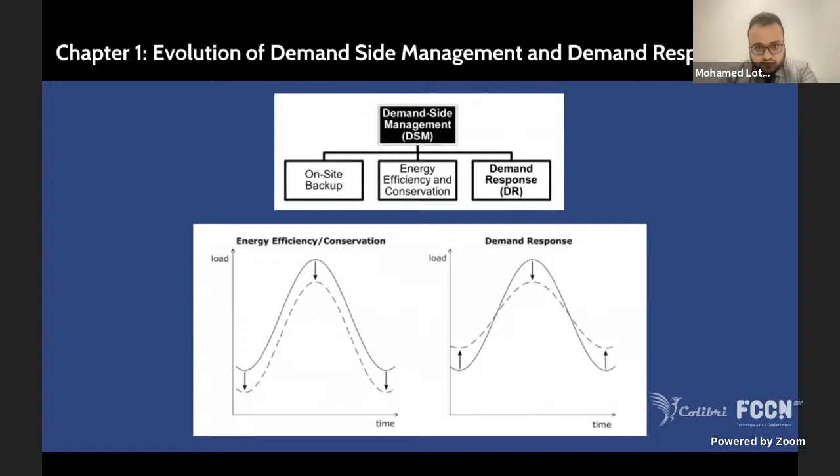Chapter 1 starts by identifying what demand-side management is, what are the different strategies involved in demand-side management, and then we go to the origins of this transition, going all the way back to the 1970s, where 3 different events, the economic viability of small generation units, the beginning of the awareness on environmental change, and the beginning of concerns on security of supply have emerged. And as such, a major shift in the electricity sector happened through liberalization and the beginning of incorporation of renewable energy sources. And this was the time when the demand side started being considered as active participants.

The pioneers of this change were the US, the United Kingdom, and the European Union, the 3 main zones that led this change. And I begin by gathering and compiling the full list of legislation for each of the 3 regions that led to this change, starting from liberalization all the way to modern demand response strategies for the United States, for the United Kingdom, and the European Union. Afterwards, by compiling all this information, I managed to draw a roadmap, 5 stages of developing full demand response programs in smart grids.

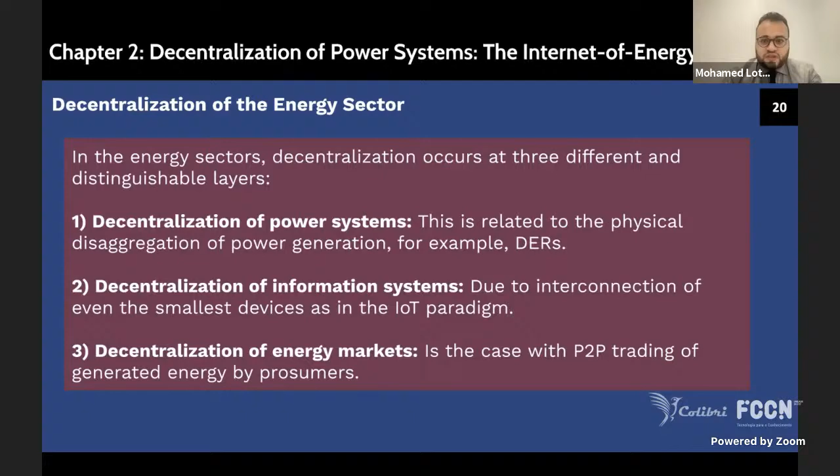More information about this chapter can be found in two papers, one book chapter that was published, an Elsevier book chapter, and another one found in the IEEE Smart Grid newsletter article that were both published as a result of this chapter. And so the introduction is done.

I move on to the main core of the thesis, which is the development of the new models. And part two discusses the transition to cloud-based operation of smart grids. Chapter 3 discusses the current state of smart cities and how we can coordinate contemporary energy management systems to come up with synergistic benefits from this coordination. And then chapters 4 and 5 take this a whole other step further and try to completely dismantle and completely decentralize the way power grids are managed.

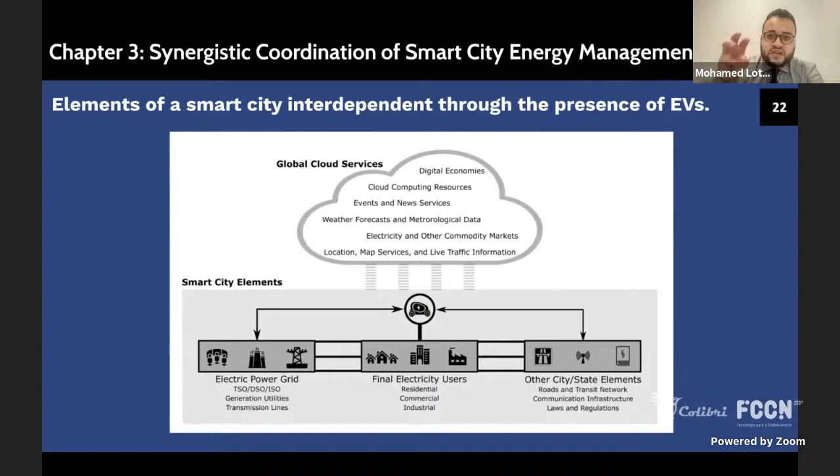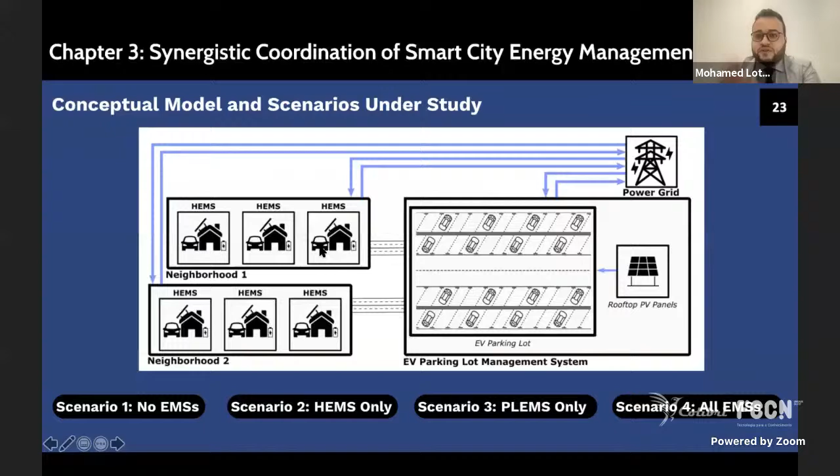In chapter 3, I start by listing the elements of what a smart city is in the current context and how electric vehicles can be seen as the main connector between these different elements. And we develop a conceptual model for this by considering two neighborhoods with home energy management systems and the faculty parking lot, actually modeled as FEUP, in fact, with its own energy management system. Both are linked to a power grid, and the electric vehicles provide the link between these different energy management systems.

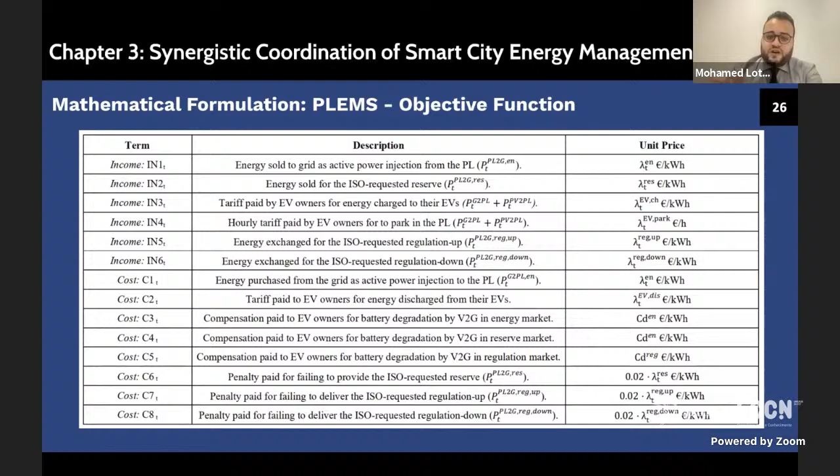We develop a mixed integer linear programming model for the parking lot energy management systems, and the constraints are shown here. I put all the equations here, and we can go back to them in discussion, not to waste too much time. This is the objective function. So the parking lot energy management system focuses on maximizing the profit, by increasing the incomes, by selling electricity, whether to the grid or to the EV owners, and minimizing its cost of purchasing electricity.

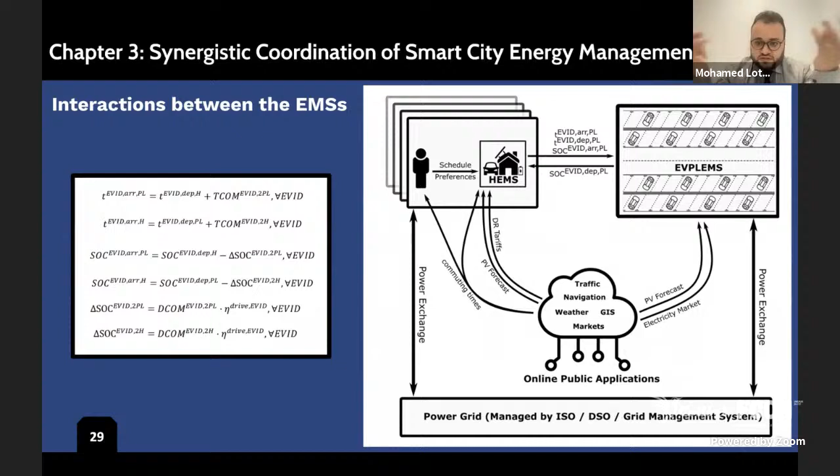On the other hand, we have the home energy management system. These are the constraints, and the objective function, of course, is to minimize the electricity bill for the owners. The energy management systems communicate by sharing the expected arrival and departure times. This is how electric vehicles provide this link in a smart city concept.

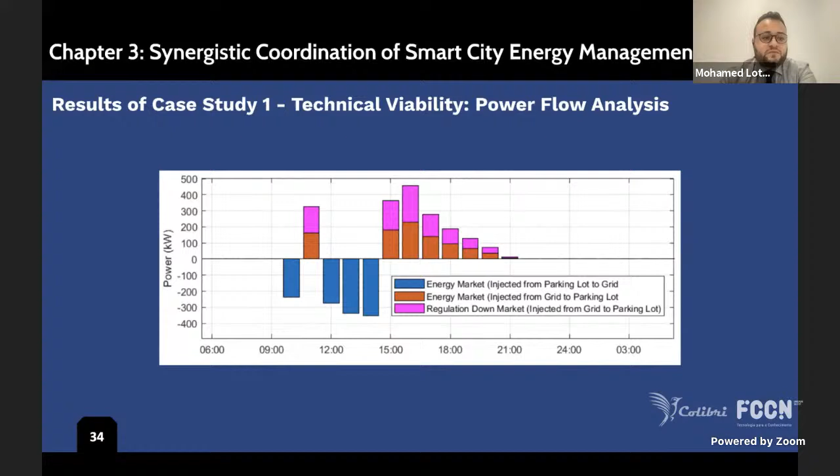And by simulating this grid, we get the active power exchange for different scenarios with and without the coordination for the smart neighborhoods, for the parking lot energy management system. And we also analyze the energy losses in the grid, the power losses, the power supplied by the grid, and also the voltage profiles. The results of the first case study show that by applying the coordination, we get benefits in terms of minimized energy losses and also less energy supplied by the grid.

This work is published in an IEEE conference paper and also accepted with minor changes in Applied Energy, full case study. And this revision was resubmitted. Now I move on to chapters 4 and 5, where instead of looking at contemporary models, we try to come up with completely new ways.

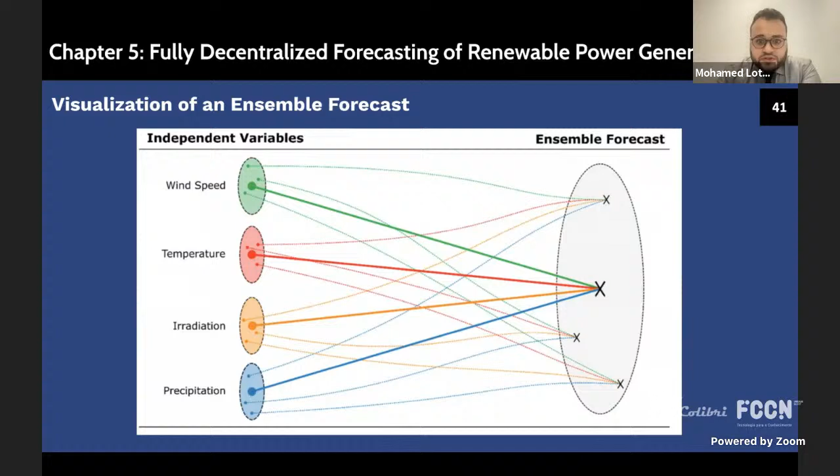Chapter 5 for forecasting and chapter 6 for power flow management. In chapter 5, a new probabilistic method is proposed to forecast renewable power generation. It is based on kernel density estimation and only relies on local and publicly available historical data. The main premise is, from a historical data set, we find the most similar cases using kernel density estimation, and from there we conduct an ensemble prediction to predict the new value.

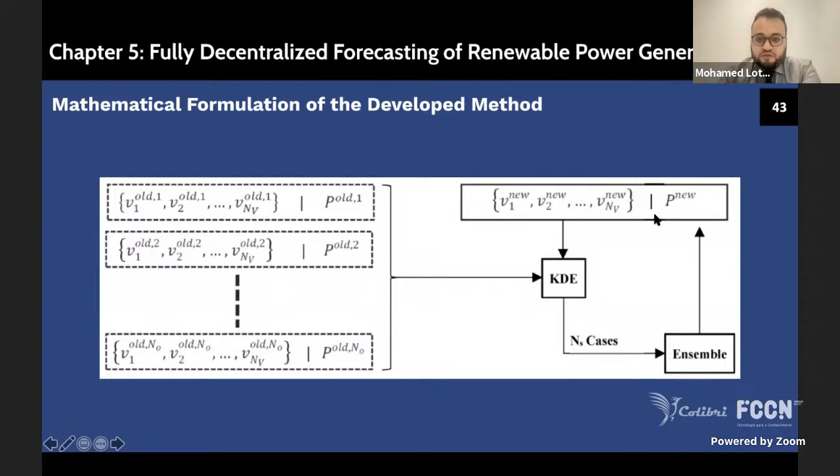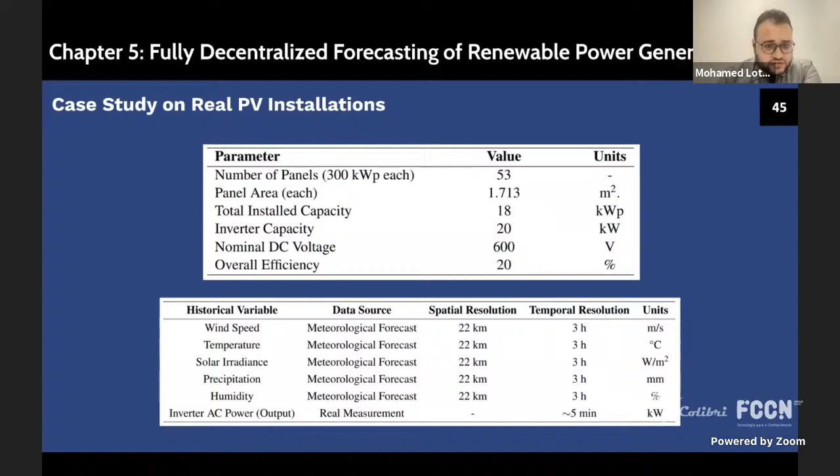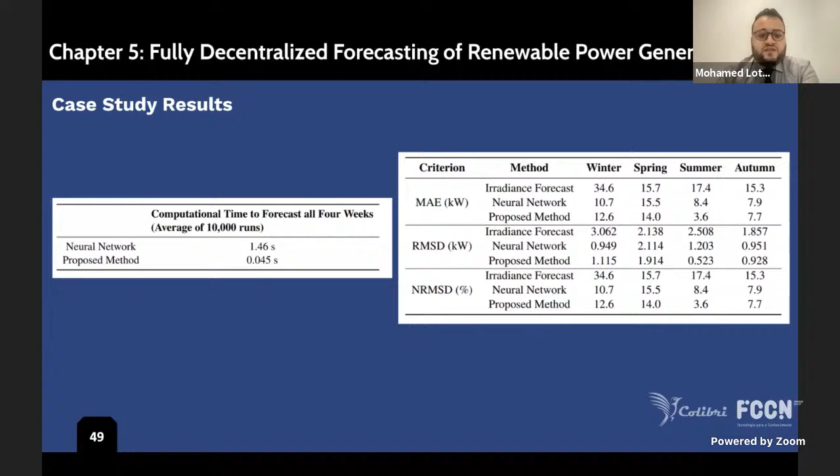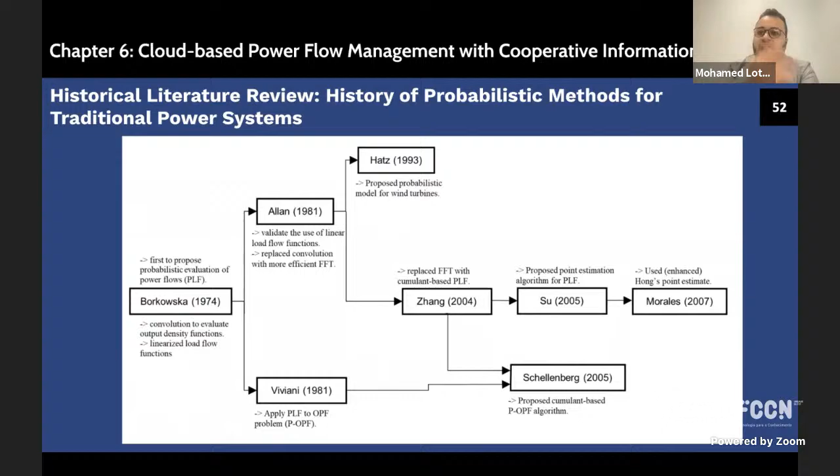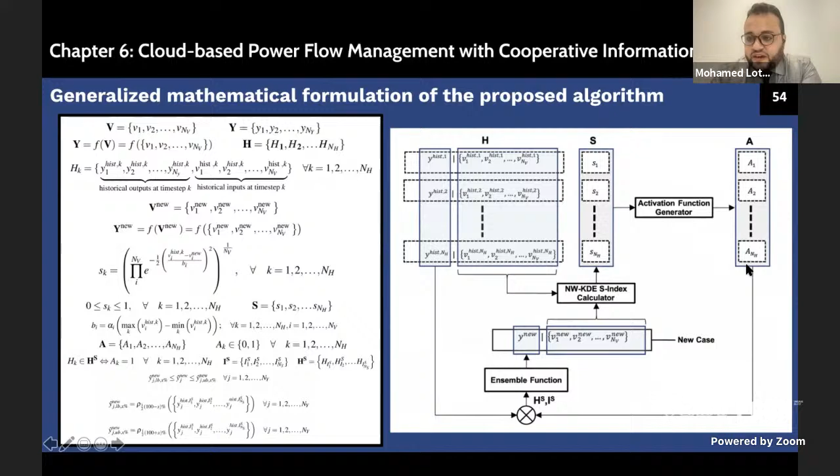And we use this method to expand it to a machine learning method in chapter 6 for power flow management in smart grids of the future, for the decentralized smart grids. We start by checking the history of how probabilistic methods evolved into machine learning methods. We categorize the difference between probabilistic and deterministic methods based on this review. And then the new formulation is presented. This is very similar to the previous case, except here the activation functions for the most similar cases are saved in an activation vector, and this will become very important in the next 2 slides.

This is the transition that we propose from centralized operation to decentralized operation. The historical log of the optimal control actions are passed on to local agents for each zone, and each agent only has access to information in their local zone. And based on that, they use the employed method to predict the optimal control actions in operation and operation planning. The activation vector can be used to have a cooperative information exchange platform between the agents to improve their control actions without sharing the raw data. And this is actually a major contribution of this work, and we investigated it by simulating a case study.

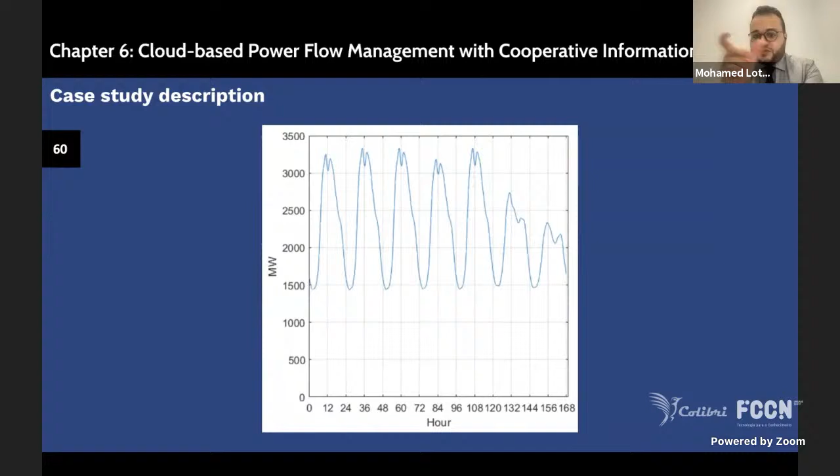We have here a 24 bus test system. We divided it according to the conceptual model proposed. We used 1 year of high resolution, so 15 minutes, data from ERSE profiles, from the Portuguese transmission system, typical load profiles. And each agent, as we said, only has access to the historical optimal control action, historical optimal generation, historical load values only within its zone, the hour and day, so only has access to local and public information. We test this by trying to predict the optimal actions within 1 week, also with a high resolution. And we conduct 3 different studies.

In the first, we check the influence of tuning the parameters, and we can see by doing slight tuning of the parameters, we can obtain an accuracy of less than 0.1% for all the cases, which is highly accurate. Then we conduct a comparative analysis by checking the power of the cooperative information exchange platform. And we can see that even without tuning the parameters and by putting random parameters, simply by exchanging the activation vectors in this cloud-based platform, we can obtain even better results and lower the errors further. So the impact of the cooperative information exchange is actually higher than the impact of the tuning of the parameters.

And finally, to validate it, we compare with the neural network methods, and our proposed method is better. It provides much more accurate results and also higher computational efficiency. This work was published in a conference paper at CPE PowerEng, and also accepted with minor revisions in the International Journal of Electrical Power and Energy Systems. This concludes the second part of the thesis with regards to grid operation.

The third part looks at end users and develops new models for energy management and planning, mainly energy management, to help guide this transition from the point of view of end users, not the grid. Chapter 6 deals with the residential sector, Chapter 7 deals with the transport sector, Chapter 8 deals with the industrial sector. We start with the residential sector.

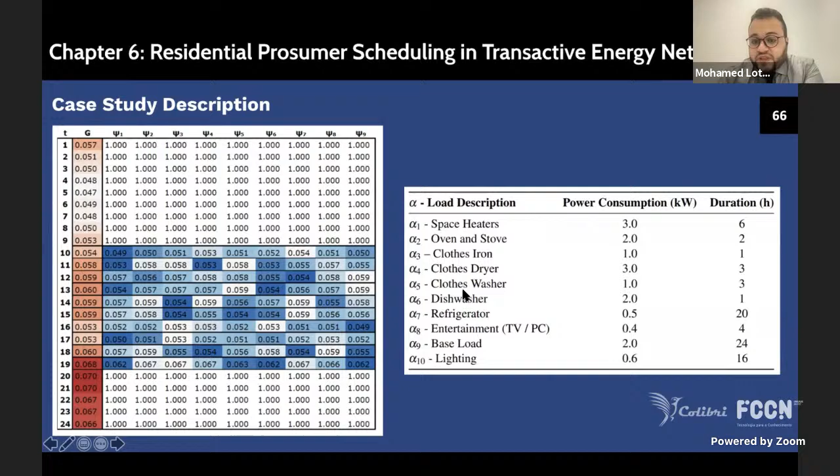Each consumer would have their different loads that they want to schedule. They provide their preferences for the optimal time where they want these loads to operate. And the scheduling tool finds the optimal scheduling of each appliance, which also leverages the energy value for this prosumer.

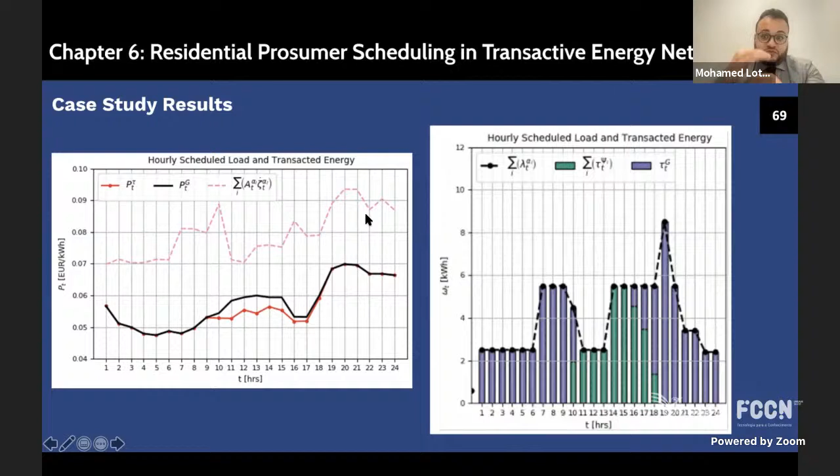We see on the left the schedule, and on the right the scheduled load and the transacted energy, so the choice between buying from the grid or buying from other prosumers. And here the pink line is the energy value, and the objective is to raise it as much as possible. And this work was published in SEST 2019 in this paper for more reference.

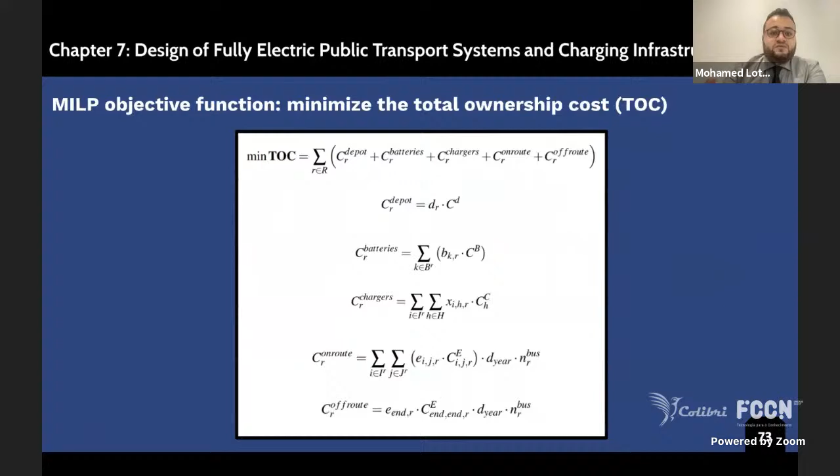Then the next part deals with the transport sector. A generic public transport network is modeled, and all the parameters are included in terms of the charging infrastructure, the batteries on the buses, and the dynamic electricity prices. And the objective is to minimize the total ownership cost of this fully electric transport network. The constraints are related to the infrastructure, the batteries, the energy charge, and energy balance is shown here. And we test it in 3 different ways.

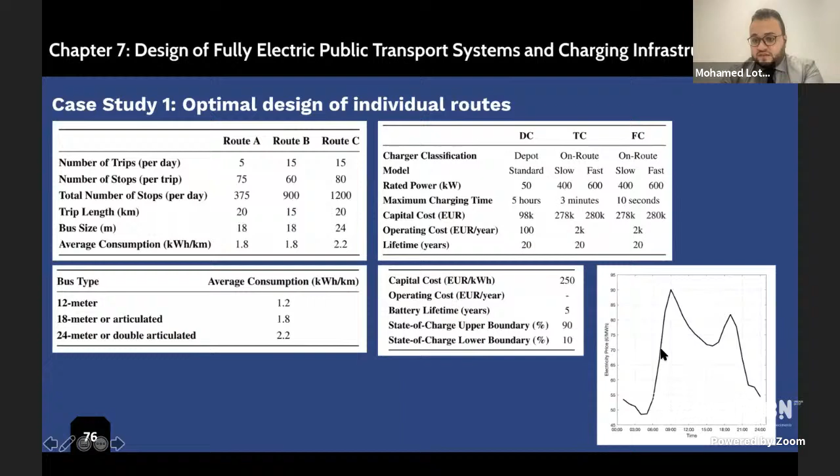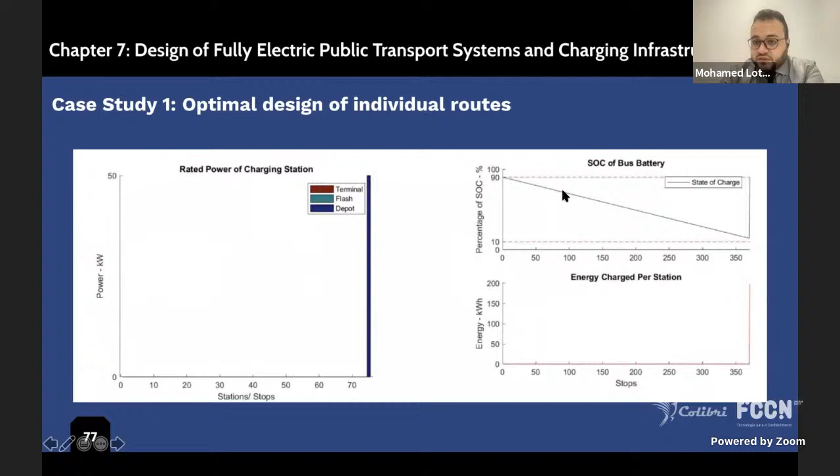First, we provide the parameters for the case study corresponding to current technologies and the average energy prices in the day-ahead market for Central Europe. And then we test it on individual routes. So here the algorithm is shown to be able to optimize the type and the location of the charger, the state of charge of the charging schedule of the bus, and also the energy charge per station. This is for the second route that was simulated, and this is for the third route. And then we can analyze here the breakdown of the total ownership cost.

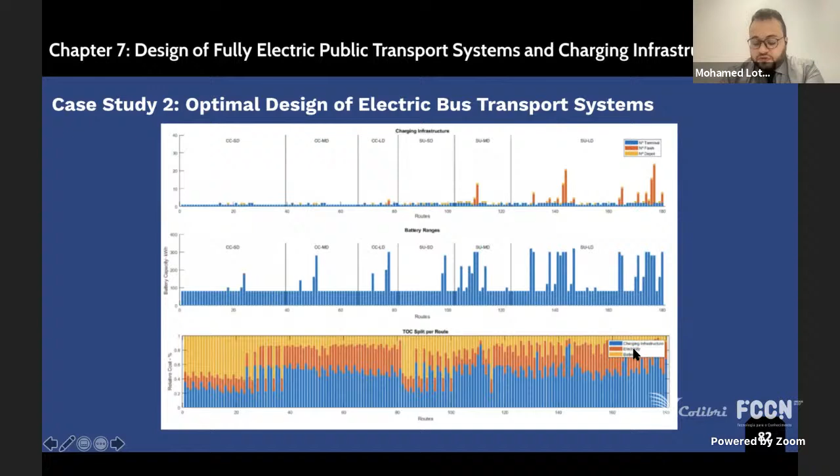And then we move on to designing full systems where we construct a system that has 180 different routes. And we are capable of finding the optimal design of the system in terms of the charging infrastructure deployed, the optimal battery capacity in each route, and also the breakdown of the total ownership cost.

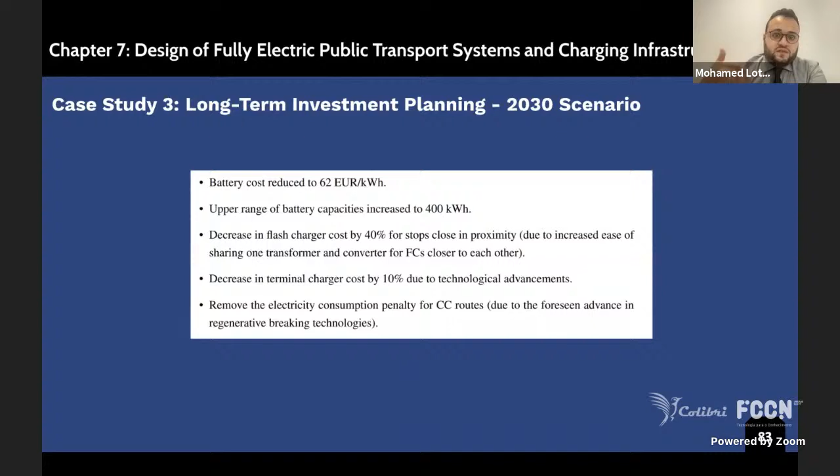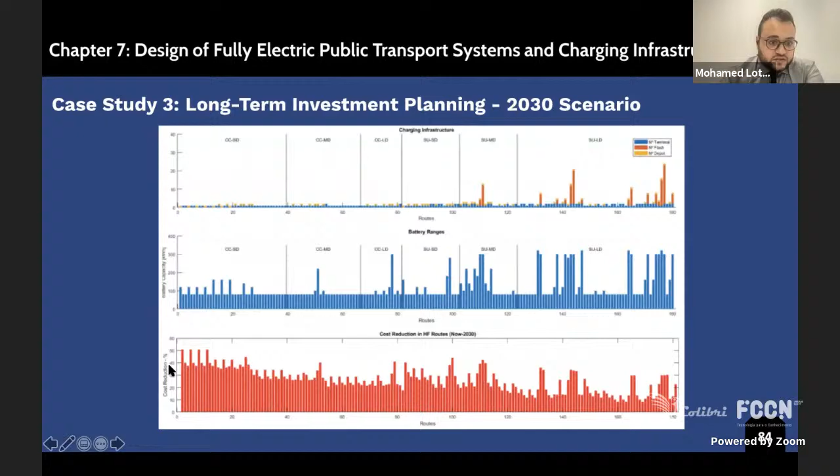The third study investigates whether this model can be used to analyze future scenarios. We investigate the change in technologies and the energy prices forecasted for a 2030 scenario. And by applying this to the simulated network, we can obtain the expected cost reduction for each route as well. And so this model deals with the transport sector, how an optimization function can be employed to optimize the design of the charging infrastructure and the design of the bus networks themselves, taking into consideration dynamic electricity prices being present. This was published in a conference paper and also in an IEEE Access paper as shown here.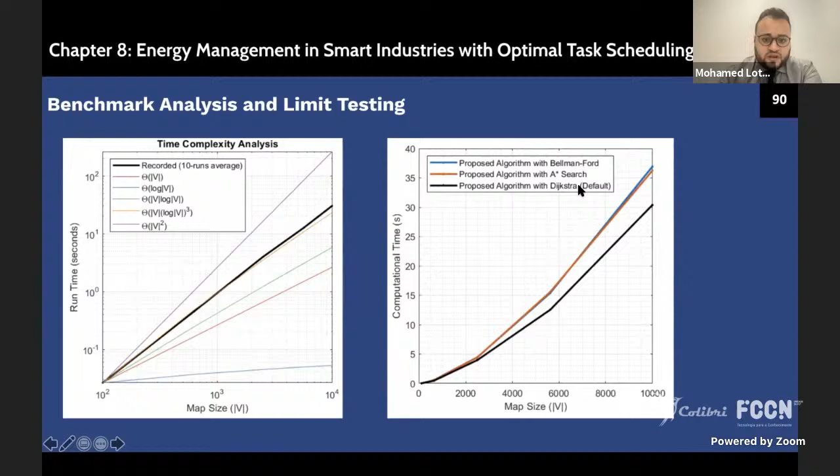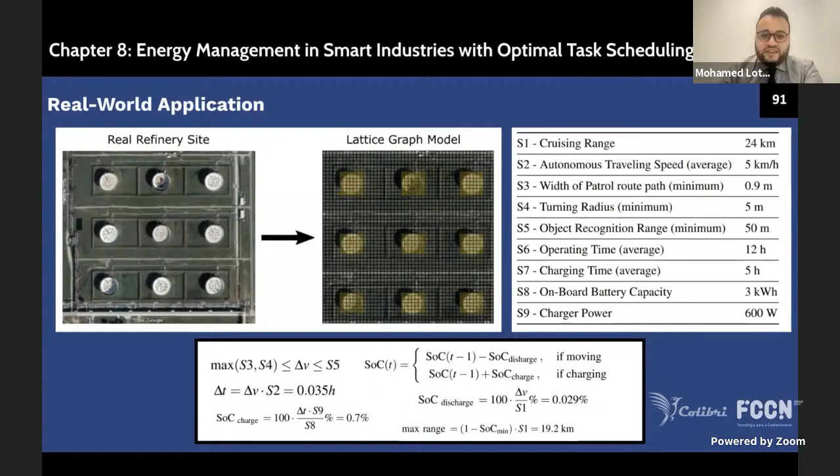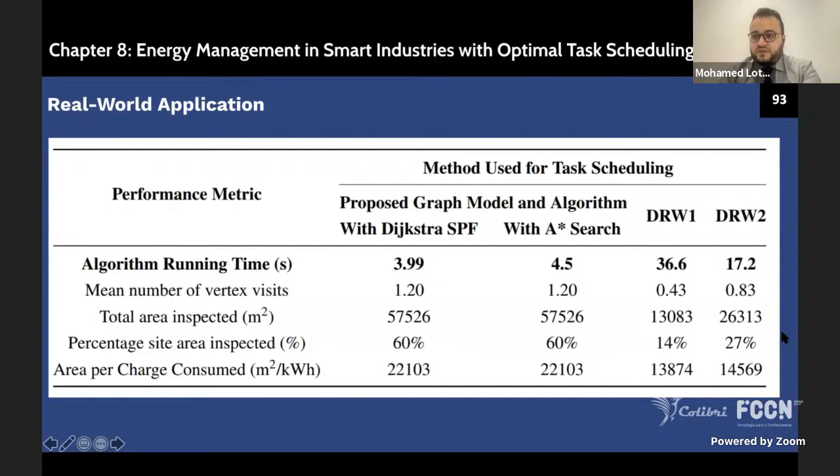We do a very detailed benchmark analysis and limit testing to test the algorithms, since it's new and it deals with a very complex problem, and also to determine the stability of the algorithm. We determine the best path finding tool to be used, and we conclude that it's Dijkstra in terms of the computational time and stability. And we simulated on a real world problem where we have an inspection problem for a real refinery site. And the objective is to patrol the site using the minimum energy cost and by spanning as much as possible of the map on one full battery charge. This is the simulation of the problem. And our model is shown to be better than other graph theory models that are used to solve similar problems in industry.

And to test the limits of this algorithm further, we rerun the simulation with moving obstacles, so in a dynamic environment where other obstacles are actually moving in the map. And once again, the algorithm proves that it is capable of determining the optimal scheduling and pathing of the agent to maximize tasks performed on one full battery charge. In other words, minimizing the energy consumption.

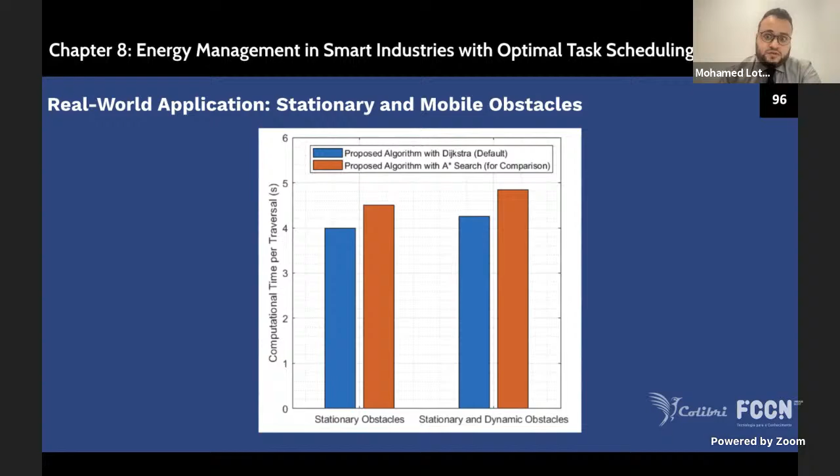This concludes the third part of the thesis. This paper was published in IEEE and it actually got the best PhD paper award, first place. And it was also published in the IEEE Transactions on Industry Applications. And those are the two papers for future reference if you would like.

Now, final remarks. I'm not sure how much time I have left, but I will try to go through this as quickly as I can. The final part of the thesis addresses the research questions. We have 6 secondary questions and 1 primary question.

The first secondary question is: can individual and proprietary data models from the IoE paradigm be used to leverage DSM and DR services from individual prosumers and microgrids, thereby improving global operation of dispersed energy systems? This was answered in detail in chapters 1, 2, and 3, and the answer is yes, they can be used to leverage DSM and DR services from individual prosumers and clusters of prosumers and improve the global operation.

Second research question is: can local fully decentralized optimization and data analytics functions enable global integration of demand-side flexibility in the energy market system operation and planning? And the answer for this is yes. This was shown in chapter 3 and chapter 7.

The third secondary research question is: can optimal consumption scheduling of individual agents in a decentralized energy system result in global optimal operation? Once again, yes, and this was proven in chapters 5 and 6.

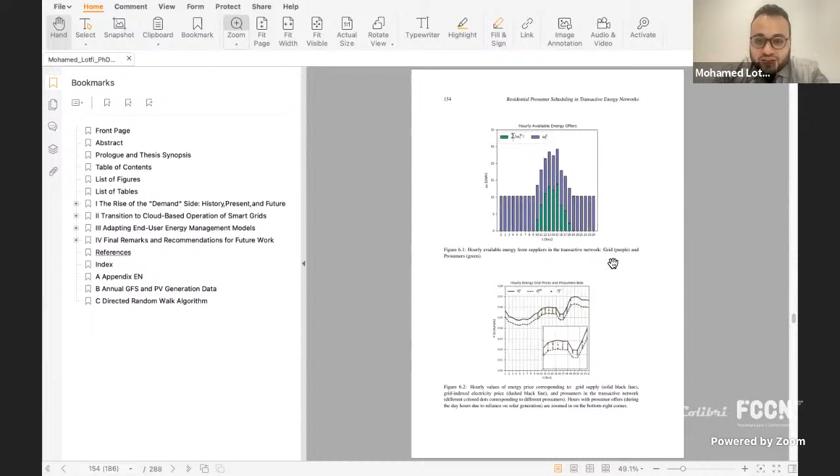Well, this word has a very large spectrum of meanings. But you are right, I did not really specify what this means. I was talking about the concept itself, and in the formulation this is done by the framework that we have here. Basically, the user or the prosumer sets preferred times for each appliance. These are not strict like other home energy management systems do, so there's no strict upper bound and lower bound for the operation.

Imagine that this is the operation time of one appliance, and this is the preferred time. The more this is centered around that, the higher the value of energy becomes in the global function. So it's optimized in this manner. It's not a strictly constrained optimization, but rather it's attracted more towards what the user defines. That is also why I decided to have it this way, instead of saying I want it between 14 hours and 20 hours.

What the user says is, I don't mind it being here by putting 1 as a low preference, but I would really like it to be here by putting 3. 1 to 3 can become 1 to 10, 1 to 100, and we can adapt that. But that's the concept. And this changes from one appliance to the other. For appliance 5, the user really wants it in this time. But for appliance 1, the user is kind of indifferent: I'd like it in the afternoon, but it can be anywhere. So it's from 1 to 2.

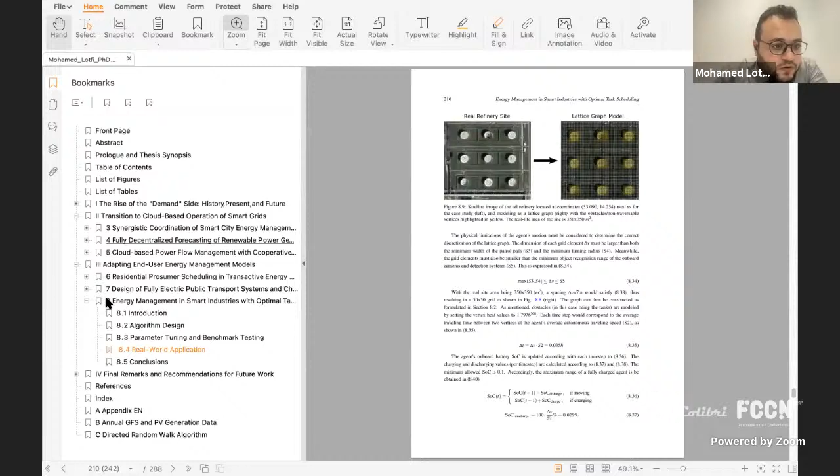I mean, it is mentioned in the chapter, but yes, it's not clear here. It was just, since you have mentioned explicitly the point, I think that the two points can go in parallel. Yes, yes. Then, okay, let's go to some even smaller spots. So it's section 4.5.1. If you can go to section 4.5.1. That's part 2, 4.5.1. Okay, here.

In the first bulleted point, you're writing about wind power output. Yes, I noticed that mistake. Yeah, while the second one is solar irradiance. And so I got a little bit lost here. Yeah, it's a typo. Wind should be solar. You're right. I noticed it after submission.

Okay, good. And also in the final bullet here, let me see. There is underestimated the power output, then we don't know what. Where? In the last bulleted point here of 4.5.1, yeah. There is a 'then', missing something here. Yes, this is true. It seems to be incomplete, the sentence. Yes, it's a typo as well. Anyway, I will send you a dedicated note on this so you can figure out where they are.

Okay, just other minor things. In general, you should avoid using the variable capital P for price because P is power. So sometimes it's a little bit misleading, but it's just in a couple of equations, 6.5 or so. Then, okay, this is fine. Here the other ones are indeed minor points. All the rest is just typos or something like this. Maybe one of the things is page 186 in your case.

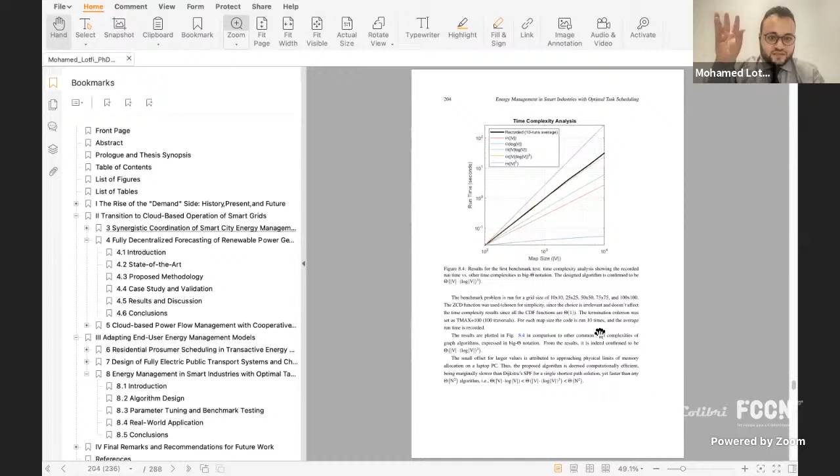The only thing that is shared between all the agents in the field is the map. So once one agent performs a task, they can, let's say, update the value of the heat function, which is illustrated here on this map. All the agents see this, kind of like Google Maps when it's updated. Okay, this street is high traffic, this street is low traffic. So we all see the map being updated, but we don't see each other's private paths or private scheduling. And that's exactly why this fits perfectly the narrative.

Okay, we can have fully autonomous scheduling. They don't need to have any coordination beyond this map being shared. We don't even need a central coordinator. All we need to do is physically update the task, and this is enabled by IoT because with the sensor or with communication infrastructure, it becomes a fully autonomous problem. This is an interesting starting point also for future reasonings about traffic systems with electric vehicles or something like this, because we have obstacles, we have all the kind of elements.

Yeah. Yes, and if I may, there was an additional part that I wanted to do, but I didn't have time, and it's very interesting. We can include dynamic prices in this model. So by adding here virtual nodes in the graph, okay? So imagine here we had some virtual nodes that do not really correspond to physical movement, but correspond to the agent staying in its place and charging.

Yes. And if the electricity price is low, this loop that we add can become the lowest cost option with the SPF. And in this way, it will prioritize staying for 1 hour, 2 hours to charge because the electricity price is low, rather than doing a task. And once again, it's a trade-off because if the task is becoming very urgent and it's been very delayed, then the path to the task will become cheaper than the virtual path of charging. If you understand what I mean.

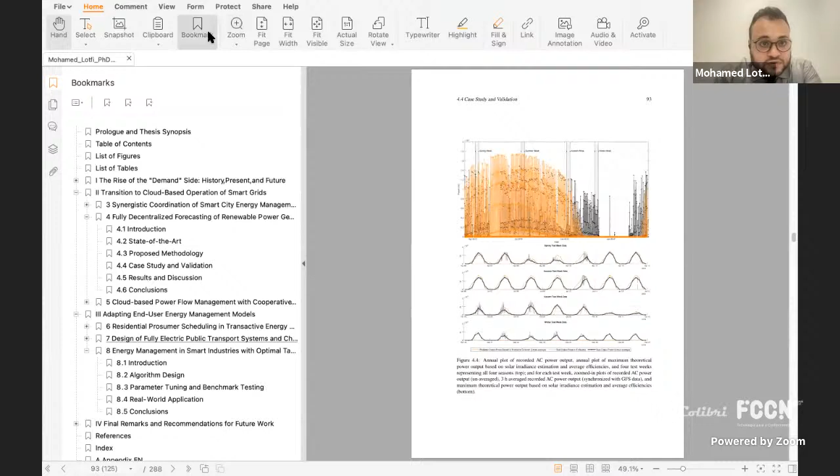What I did investigate is whether the method is capable, let me zoom in here, is capable of capturing these high frequency fluctuations. And this is in terms of the second part of your question, the effect of the resolution. If I only give it average data. So I only gave the method this black line. I did not give it the high resolution measurement.

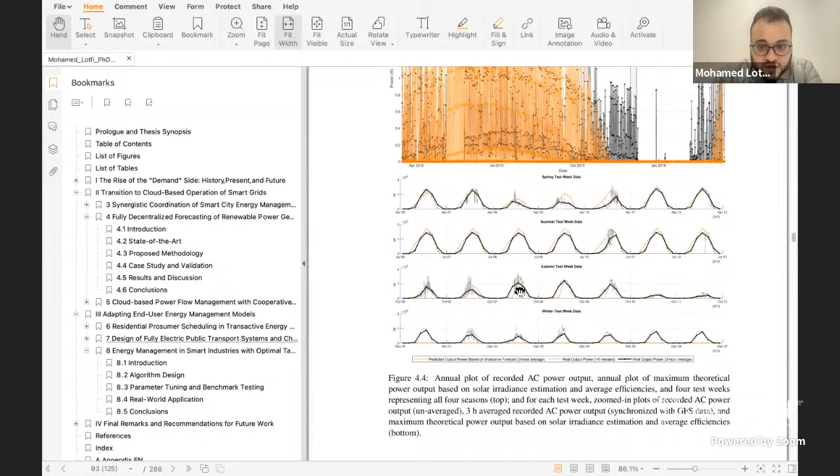And in the results, we see that we are capable, let's say, if we look here, even though the algorithm was only given this averaged data, it still managed to capture high uncertainty in the areas where we have very high fluctuations. So we can at least know whether there is some uncertainty to be expected or not. This is the first point.

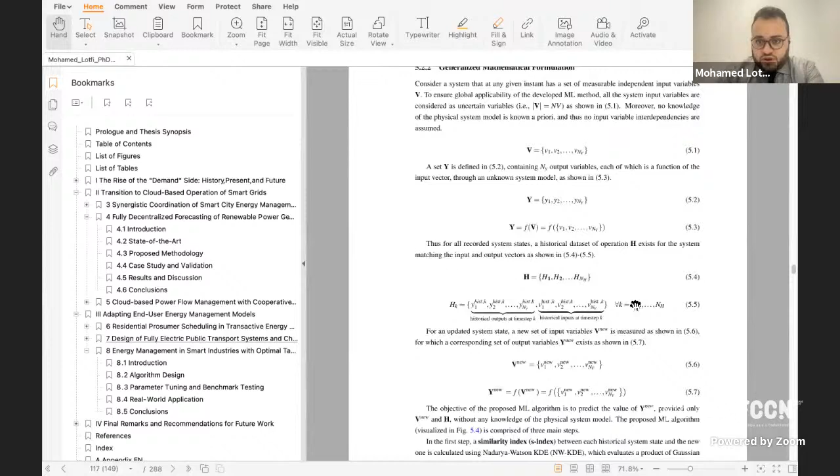The second point is with regards to chapter 5. So as I said, I'm already assuming that we have an already running system and we are transitioning. So we already have the data sets available. And here, perhaps a solution for this is what they do in wind power forecasting, which is called hindcasting. So what we can do is in the beginning, we can have two algorithms running.

Of course, as we go with the probabilistic algorithm, we'll have a deviation of the error because, as you said, each hour has some, even if it's a very small error, that is added to the data set. And with time, this error accumulates. We have an accumulated error over time. Yeah. And what can be done is we can have some hindcasting, sort of forecasting, to keep correcting this data by running simulations after this is done.

So the objective of these methods is to be employed in real time. They're very computationally efficient. But then we can use later on slower algorithms or slower predictions or even physical measurements to correct this data as we go.

I'm not sure if this really answers or gives some insight into the question, but this is what I think. It's okay. This was the kind of reaction I intended to have on your side.

Yeah, indeed. Okay, I think that I still have a few minutes, but I think that I can leave the word to my colleagues in order not to use all the time. And then at the end, if there will be a bit more time, maybe I can have another question. However, it's okay. Real congratulations on my side. Thank you so much. Thank you. Very, very well written thesis, and the contents are strong. Thank you so much.

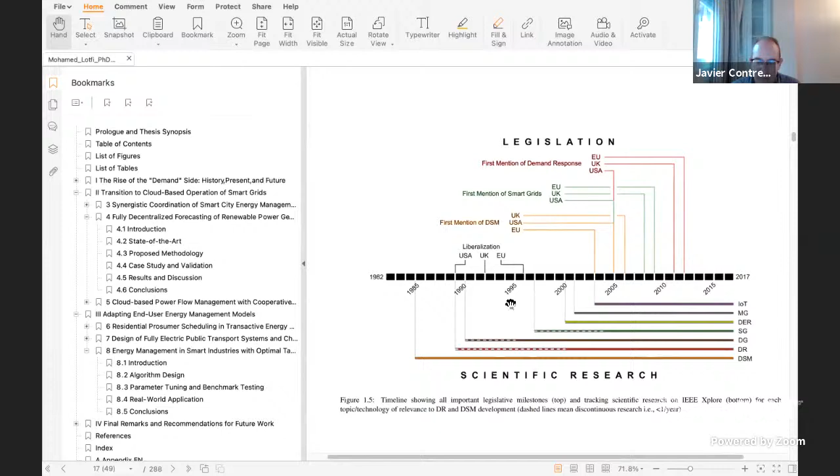And then you mentioned two different types of demand response, mandatory and voluntary demand response. In my opinion, this first chapter is kind of a dissemination type of chapter. So it's mostly for advanced or not so advanced readers who would like to know what demand response is and the relationships between demand response and DSM, etc. So you mentioned mandatory and voluntary ones. In your opinion, although you have written about it but not that much, which one would you enforce if you were in charge of the legal issues related to demand response and had the chance to decide yourself?

I have an option to have a mandatory demand response, which you mentioned, by the way, is kind of incentive-based programs, or you have the option to use a voluntary demand response, which is based on prices. So one gives incentives, the other one gives prices. You know that prices are mostly related to markets. Markets and prices are highly connected, and incentives are something that you may use to make people willing to use your type of regulation. So which type of regulation, according to the study that you have developed in this chapter, would you recommend? Or if not, would you recommend some type of combination according to what developing and developed countries have done in the past? That's my first question.

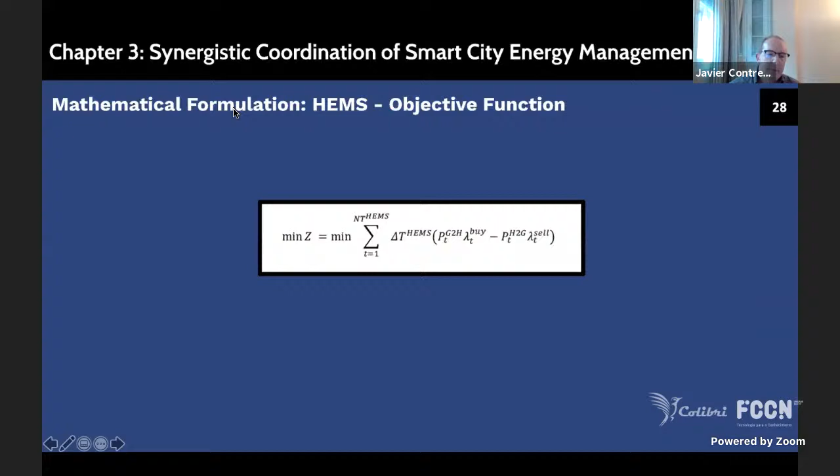So we tried to make a synthetic case study, as you said, for two reasons. First, because it's more straightforward for us. And second, because it's better in terms of scientific publications to have something that is reproducible by readers, so they can build on it. But we assume realistic uncertainties of the transit times based on real traffic data from Porto.

So we took two neighborhoods and we measured what is the transit time between this and this. You can do this on Google Maps even. So you can calculate the time in the morning, the time during the afternoon, the time at night, and it will give you different expected transit times based on real traffic data. So you can, let's say, get more or less an estimation within the metropolitan area of what is the variation.

And then we assume different types of schedules. This was more heuristic, but it's what we encounter at the faculty at least. You have people with morning schedules, people with afternoon schedules, and we do basically a combination of all of these things. And the script that we use to generate this data applies a random element as well.

So you have different categories of schedules, different categories of arrival and departure, different neighborhoods that are different distances from the parking lot. And on top of that, you have a normal distribution to add some random element into the schedule. On top of that, I'm not sure if it is shown here. No, it's not. But basically, we use typical load profiles. They are the same load profiles that we have in chapter 5.

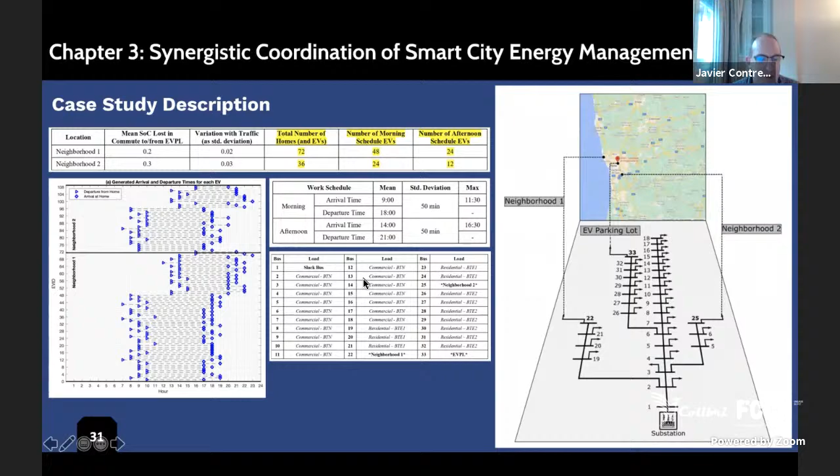That's why I asked. Then, okay, going back to the steps, you generate the schedules, then you run the PLEMS code for the state of charge for each electric vehicle. So that means that basically this parking lot acts as a charger for the vehicles, and they exchange also power with the grid. Then you run the HEMS code for each individual home to determine the power exchange. And then you say in step 4, at each time step, run AC optimal power flow for the power grid.

So my question is, they exchange information. I assume this type of information is not proprietary. I mean, it's kind of free information they can exchange because they do not release private information that could harm themselves or that couldn't be good for them. But then you also mentioned, and that's also in a picture, that there is an exchange of power of both systems, of the HEMS and of the PLEMS.

But then you show the results. And of course, the results are kind of what I would expect, in the sense that, depending on which system you are talking about, they have different schedules, they have different objective functions. So my point is, is this type of coordination the best you can do with both systems? In my opinion, it's an exchange of information between two systems in which both of them optimize their own objective functions by themselves, and they count on the other party's information. Basically, that's what I understood.

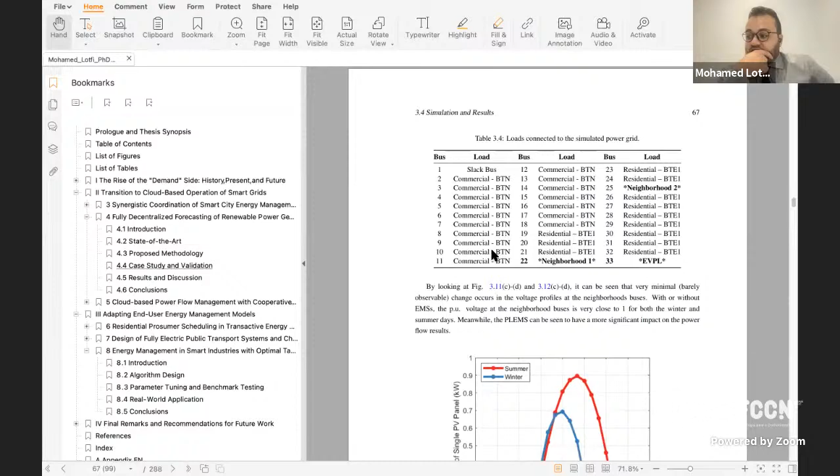With regards to the EVs, yes, they are basically batteries on wheels, so to speak. And yes, the objective functions are very different, and we maintain them this way because this is what will happen in reality. No one is going to open an EV parking lot without their main objective being making profit, and no one is going to invest in a smart home energy management system without wanting to minimize their energy costs. Each person wants some return on their investment. What comes to my mind is for there to be some sort of dynamic changes in the contracts.

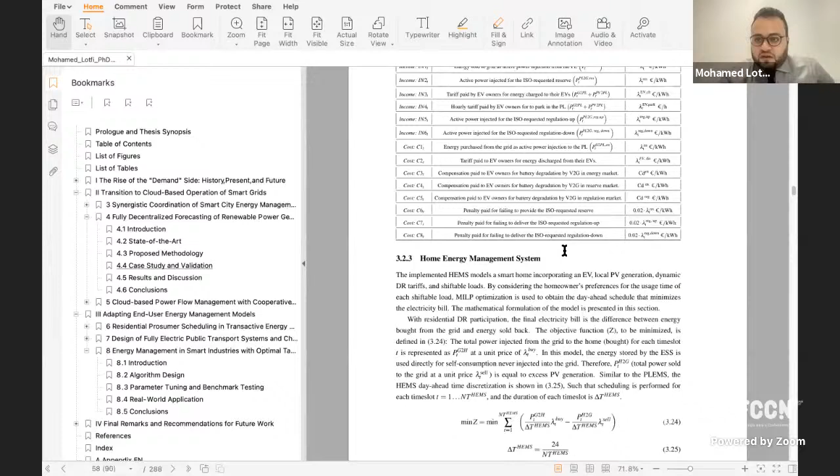So let me show you here in the cost function of the parking lot energy management system. There are different unit prices that are set as a contract between the EV owners and the parking lot, so the ones participating in the smart parking lot.

And what can happen is we can make those dynamic. There can be some sort of bidding back and forth between the EV owners, like, okay, no, if you're going to discharge me at this current time, I'm just going to go back home. So either pay me more for discharging my EVs or don't do it. So there could be this two-way communication and another market between those two and also the grid eventually. In this case, it was considered static.

The thing that I did to try to consider this, or even have it there, but in a very generic or general perspective, is I considered real market prices. So for the EVs, I consider time of use prices from EDP, and I consider day-ahead prices in the Iberian markets.

And in a way, this is a communication between the grid and the two entities, because the energy management systems would respond to these prices. It's part of the optimization problem. And this is the only way that this is reflected. But yes, this can be done dynamically, and we can investigate this in follow-up work. That's my response.

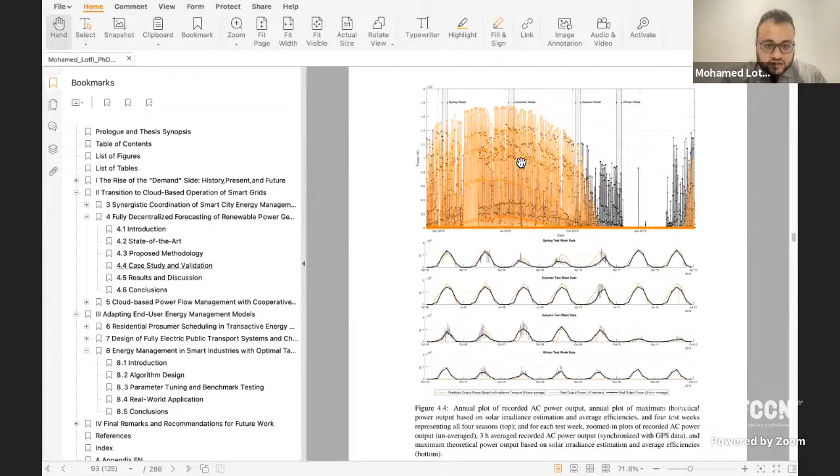With regards to the data, I use the data for the entire year. So we're trying to forecast one week from the winter, but we have very high resolution real data that was recorded from the PV installation. And I decided to be very honest about the results: these are the results, this is the data that we provided, this is what we have. That's the second point.

My explanation would be here. As I said, chapters 4 and 5 are linked to each other. The first proposes the use of kernel density estimation, and the other one completely extends it to a full machine learning algorithm. And in here, we did not tune these bandwidth coefficients for the kernel functions. We set them heuristically.

The smaller the value, the higher the correlation between this variable and the output. And we did it using correlations actually. There's high correlation between solar irradiance and the expected output, of course, so this has the narrowest band for the kernel function. But it was not tuned. That was done in chapter 5, and we highlight the effect of tuning those parameters, and it has a significant effect, not as significant as the cooperation framework, but still a significant effect on improving the results.

I am pretty sure that if we do a study on tuning these parameters, this will no longer be the case. So that is my explanation for the winter case.

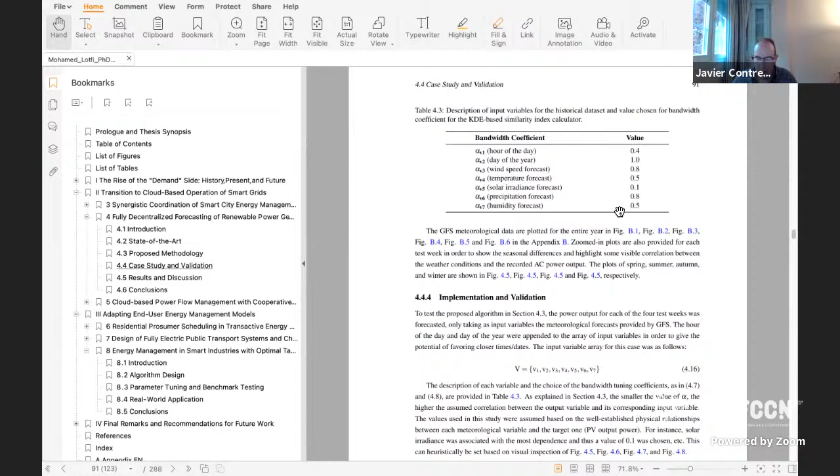Yeah, I saw. And the other point, and it applies to chapter 5, is why do you only compare with two other methods? Why not time series methods, the classical methods that we have used sometimes for this type of forecast? Did you try, or did you think about trying any type of time series methods? Yes, there are a lot of methods.

Well, first, in this chapter, I make a clear distinction between basic, let's say, probabilistic methods, and I go into detail in the introduction about time series methods and point estimation. So I really take this all the way to modern machine learning algorithms. And in fact, machine learning is just an evolution of these probabilistic methods.

The idea was, well, first there was a time limitation. I just wanted to compare. We have a decentralized case. I want to compare it with the centralized solution, which is the ACOPF solution. And I thought of comparing it against a well-established method, which is neural networks, and also to be consistent with the previous chapter. We could have employed many more methods for comparison.

In fact, a lot of the research work that was analyzed in the literature review does this. There are 5 or 6 other methods that could be used for comparison. And not only from the probabilistic category, but we can also use methods like ADMM to compare decentralized probabilistic approaches with decentralized deterministic approaches. That is also something that could have been done. Why was it not done?

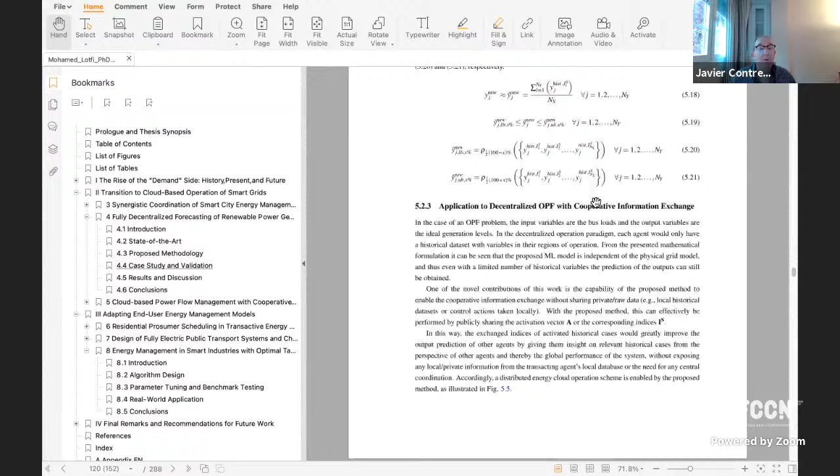But my point is, I assume that there is some type of uncertainty when you run your model. Where is the uncertainty so that you need to rely on previous values? Which is uncertain in your system? The demand? What's exactly uncertain, to have to rely on forecasting? Information outside of our zone.

Yeah, because it used to be, for example, in this IEEE 24 bus, that if you have a single operator of the system, he should be able to know everything, and he should divide the system itself in different zones so that you can exchange information. So you're assuming now in this new picture that whoever is in one zone does not know what is happening in other zones, right? That's what you are assuming.

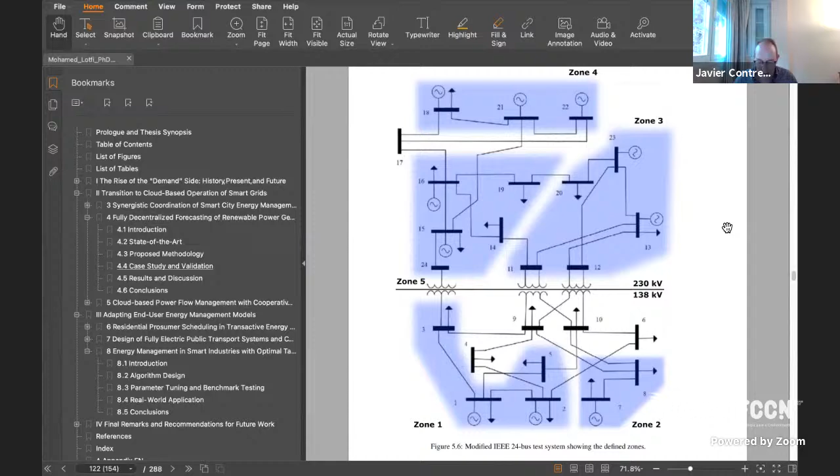I don't have problem with anything, but on chapter 6, I found it's a very interesting idea about the social welfare models that we could discuss forever, because social welfare is a controversial issue. What is the value of social welfare? But let me go through one question I have only on this one.

So just to conclude this chapter, when you show the results, that should be the preference for allocation. That assumes that it's tied to the type of social welfare that you have defined. If you change that social welfare, results would also change, right? That's my point. So it's dependent on the social welfare function that you assume this type of prosumer is using, right?

So are we talking about equilibria? Are we talking about competition? When I compete with other guys, would you say that the results show some type of equilibria by showing what each one of them is scheduling, assuming that the other ones are also bidding? Is it some type of equilibrium result, competing prosumers?

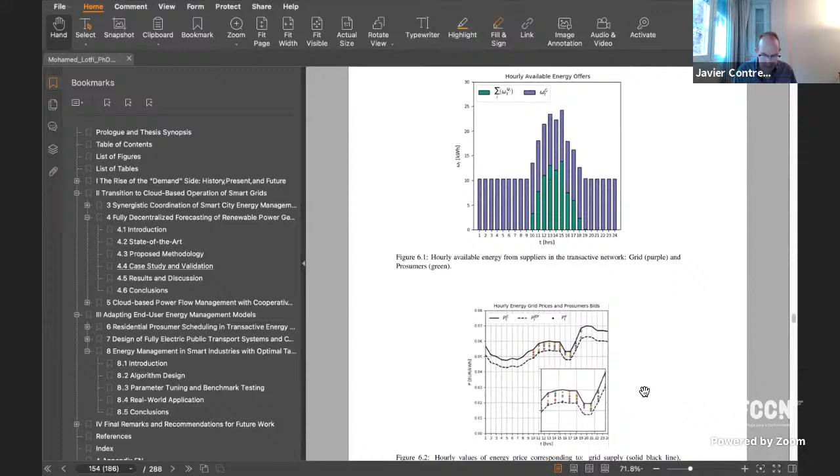That was my understanding. And to conclude with chapter 7, in which you mix some type of electric public transport system and charging infrastructures. My question is only about the TOC, the annual total cost, the objective function. You assume it's a summation of 5 terms. Yes. You are assuming that there is a company that owns everything. It owns the batteries, the buses, the chargers.

I would assume that if you would like to have some type of business model, I may be the owner of the chargers and I charge you with tariffs. I may be the owner of the buses. Why did you have a centralized optimization? Or am I missing something in this model and this is a simplified version of reality? You may know better than me: is it true that in this electric bus system, the bus company owns the chargers, for example?

That's a very good question. No, I did not think of decentralized ownership, which is definitely an important factor to consider. The objective here was to minimize the total cost of the system. So we look at the system itself. It was not a simplified model because all of the parameters were considered: the battery sizing, the length of the routes, the parameters of the routes, the dynamic electricity prices. So it captured the entire system.

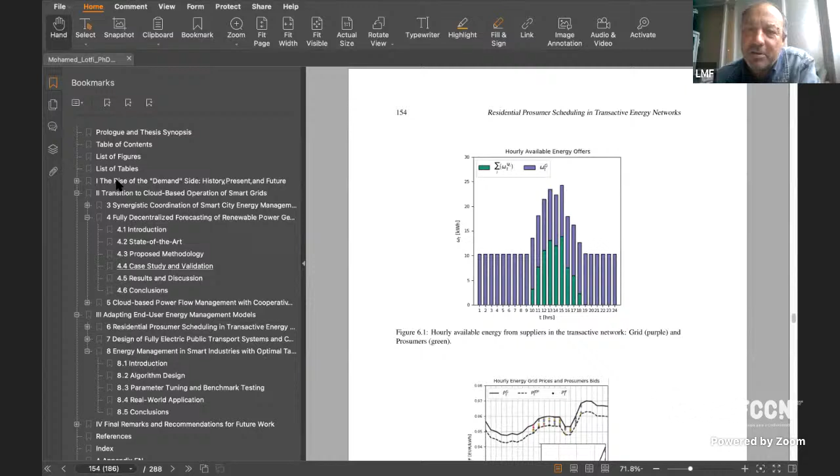You know, I must tell you that while reading this, and I'll start almost from the beginning. So let's just take a look at the abstract. Just one page abstract. That's good because it's just one page. Okay, here we go. There we go. Can you make it a little bit bigger? Yeah. So I come from kind of old school already.

I take a look at it and I start reading: technological advances are enabling this, suitable information and communications are needed to operate. And then third sentence, this is accelerated by increased unsustainability. And I see, what is this? Where? First paragraph, beginning of third sentence. Yes, this is accelerated by increased unsustainability. Right. So what is this?

That the traditional models that we have to solve problems in power system operation and in the energy sector in general are becoming more unsustainable and unsuitable as systems are becoming more decentralized. So they need to be adapted. So traditional models, traditional mindsets of managing end users in the different sectors. Mohamed, are you reading something? No, I'm trying to explain.

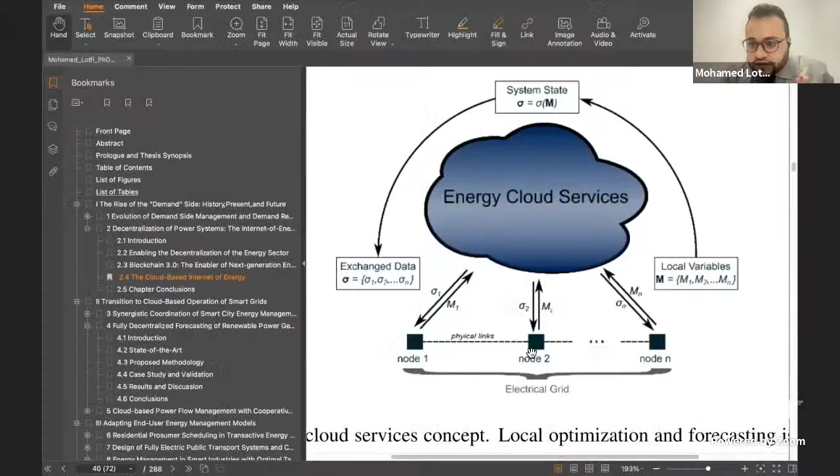This figure, let me share the screen again. I'm so sorry I disconnected. This figure was supposed to augment this part, but because I was trying to organize the thesis, it ended up being at the end. So to separate between the different levels of decentralization. So we can have, let's say, a centralized system with large generation centers that is being operated in a decentralized way, or the opposite. But let me go more specific. Is there a higher level and a lower level or not? Ideally, what we're trying to reach eventually is no.

In that picture, can you show the picture again? Here. In that picture, the cloud is above, is at a higher level. But this is just a picture. It could be at any level. So the nodes are in no way coordinated by the cloud services? No, they share the services. They all share the same services that are available in the cloud, the same way we all use map services or weather services. So we share this information.

This cloud should be in the middle of these nodes. Yeah, okay, yes. From the first look, it does seem like a hierarchical algorithm or a hierarchical structure. Yes, you're right. Now that I look at it from far away, it's true. It should be, let's say, but it's not. Okay, it's just a question of sharing. It's like a common service.

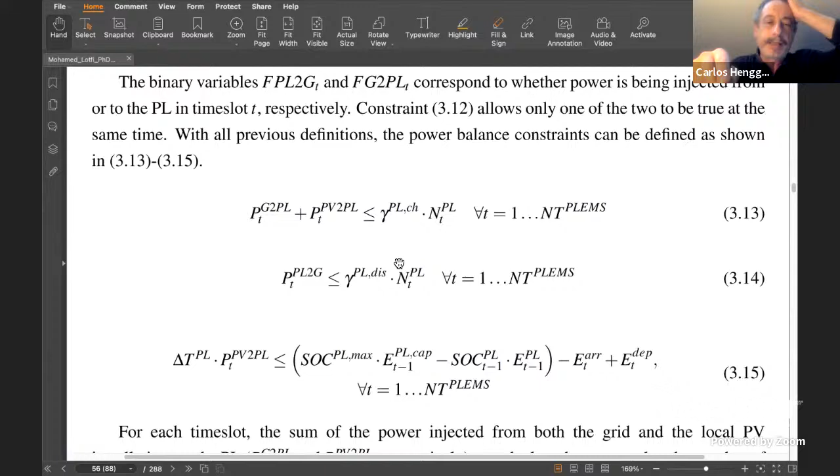You see that in expression 3.16, you have a delta T that was never defined. I guess it's delta T PL. Yes, that's a typo. Parking lot, yes, but there are some issues of this type. Since you don't have a notation at the outset, we never know whether it is a typo or another entity that you introduced into the model.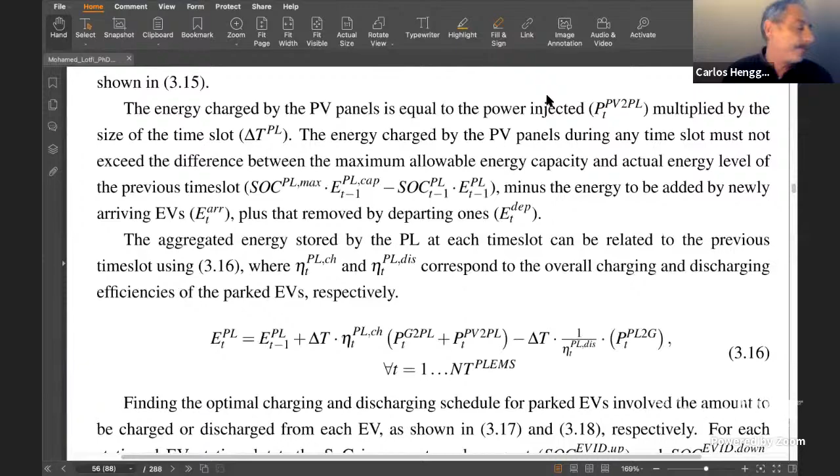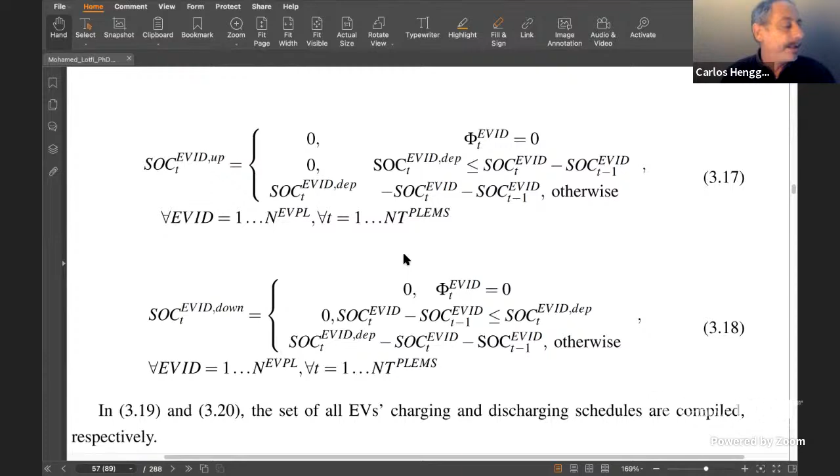In expressions 3.17 and 3.18, these expressions are not linear, as you recognize. It's not difficult to do, of course, but they should be made linear by the introduction of auxiliary binary variables and sets of constraints. That is to say, as they are, this is not a MILP model, not a mixed integer linear programming model, because these components are not linear. They can be made linear by introducing auxiliary binary variables and sets of constraints.

But for me, the worst part in this model is the objective function. You see on page 55 at the bottom, this objective function is completely unreadable. Even with a bit of imagination, you cannot read the objective function because you don't have an explicit expression that gives you each one of these terms, each one of these entities. And even if you use the table at the beginning of the next page, trying to figure it out, you see that

for instance, IN1T is not equal to the variable that appears in the second column multiplied by the cost parameter, because the cost parameter is money per unit of energy. So you should multiply by delta T, which is the length of the unit of time, for this to be consistent. Only this P multiplied by delta T is energy, which then should be multiplied by a cost of energy. Moreover, this P never appears in the model. This one.

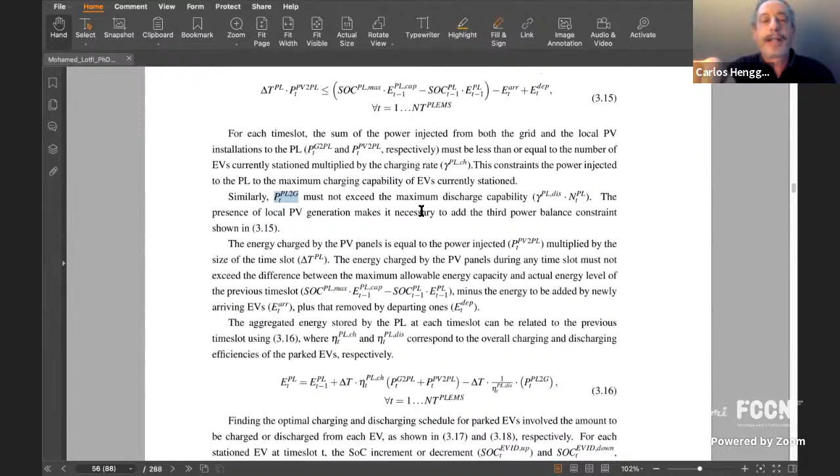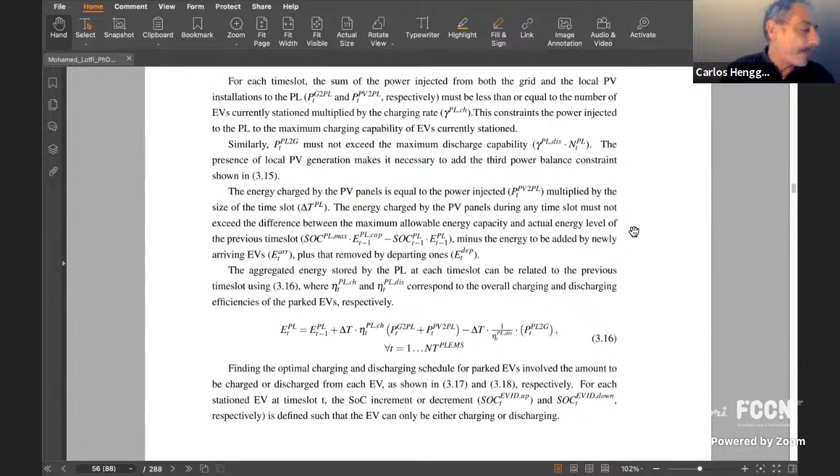Since my time is quite scarce, maybe it would be clearer to state the objective function in a more explicit manner, so that the objective function, which is a crucial entity of the model, appears clearly in the model. I had other questions regarding the interpretation of some results. I found the results interesting, and they would raise some issues, but we do not have time. I enjoyed chapters 4 and 5, although I'm not a specialist in forecasting issues. Chapter 6.

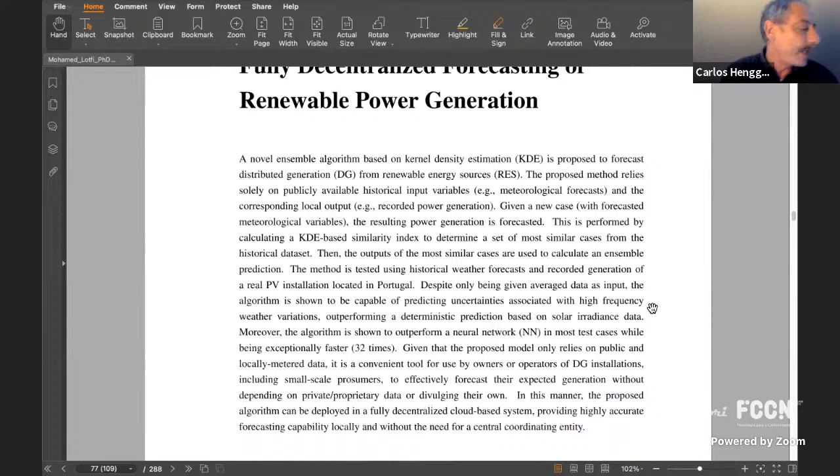I must confess that I depart to the reading of chapter 6 with some prejudice. I must recognize that, because I found this way of modeling consumption using utility functions a kind of black magic. If utility functions are not rooted empirically or theoretically with strong axioms, I think utility functions are more or less useless. They give what we want them to give.

Okay, and so on chapter 6, for instance, on page 147, I think there are lots of entities that are not quite defined. For instance, expression 6.2, but there are others. Q2 and Q0 are never defined, or again, maybe it escaped me because there is again no notation at the beginning of the section of the chapter in this case, but Q2 and Q0 are never defined. So it was very difficult to read the flow of this model, so there are several entities here using these expressions that are not defined.

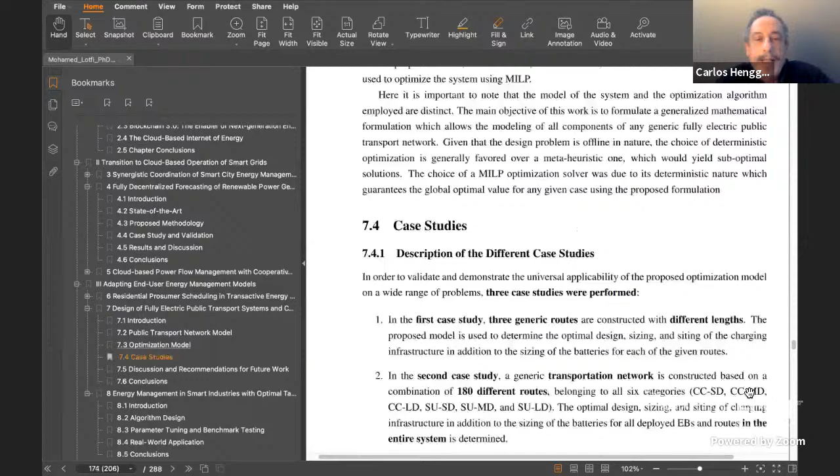Just a final issue regarding the algorithm on page 197. 197, yeah, can you tell me the section number? Excuse me, it's page 197, the numbers that appear on the pages, the algorithm 1 there. I must confess, I tried to follow the algorithm. Yes, in the Dijkstra. I tried to follow the algorithm, but I couldn't, because there are some entities that I imagine are external to the process.

For instance, let's see the main cycle, while, and the control variable is running, which should stop the cycle somewhere. But this variable appears nowhere and is not changed. So the cycle runs forever.

Yeah, but a lot of algorithms even start with while one. It basically means that this is continuously running, unless the entire program, the entire algorithm, or the entire process is interrupted by an external force. So there are a lot of algorithms that have a condition of while true or while one. This is common in algorithm descriptions.

So yes, the main point here is to indicate that unless an external interruption happens, this continuously runs. It doesn't converge, it continuously runs. It's a continuous algorithm. That's precisely what is intended. So it's more a process in which an algorithm is embedded than a formal algorithm, because in general, an algorithm should have a stopping condition. And the stopping condition, as you said here, is external.

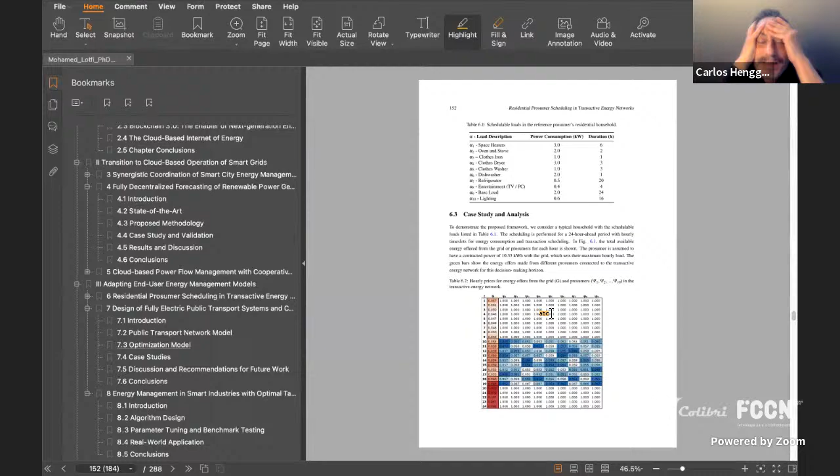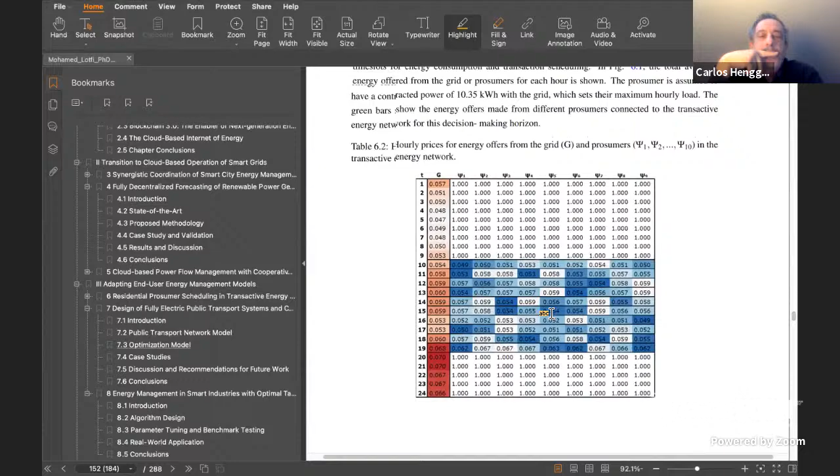Sorry to interrupt, but there's just an issue where you say that there is assumed the contracted power. What is there is not contracted power. What is there is energy, unless you consider that it's constant and stable for a period of 1 hour: contracted power of 10.35 kilowatt hour. Oh, no, this is a typo. Okay, so it's kilowatts. Yes.

Okay. So a final word. I found the answers you give to the research questions quite well organized, quite convincing. It seemed to me at a certain point, in some of those answers, that there's a kind of re-engineering. That is, the answer was there before the question. But formally it was completely correct, and I congratulate you for the amount and the quality of your work. I will send you my annotations. It would give an interesting discussion, but the time is very scarce.

If Professor Peter allows it, I just want to say something quickly. I agree with you 100% that mathematical formalism is extremely important. I did put a lot of effort, and I always do in my papers. A lot of the issues that you raised were actually fixed in the journal paper revisions, after the submission of the thesis, and I completely agree. I just raised the issues because I know they are important. Thank you very much. Thank you, Carlos.

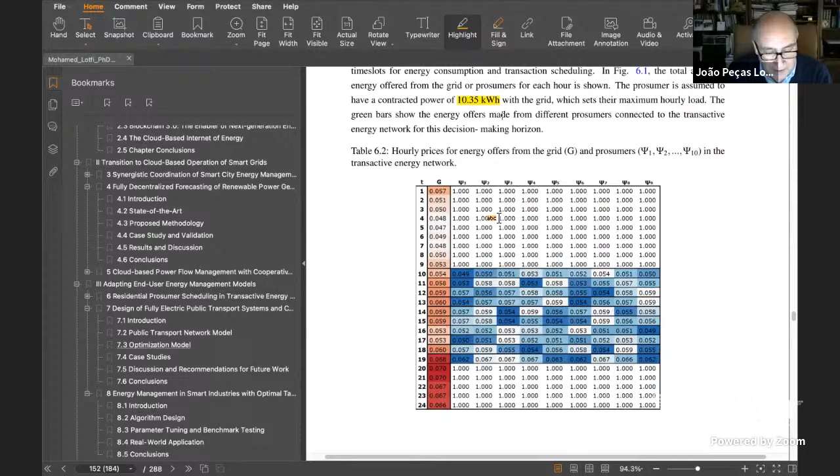So we need to proceed, and please understand that I also need to keep the time. This is a difficult job with such a rich thesis, but this is also my job. Of course. So I would like to give Professor Manuel Matos the floor for the next 10 minutes, please. Okay, thank you, and thank you for being invited to this jury.

Mohamed, you presented a big thesis, which is a multiple thesis because it deals with many things. I think that there are perhaps too many things at the same time. It was not necessary to have all these chapters, all these models, and so on. But you decided to do it, so it's okay. But understand that this loses a little the global idea of the thesis because there are many separate things.

Now let me just add something to what Professor Carlos Antunes said about the research questions. When I read the research questions, I had the idea that the answer was there before the research questions were defined, but that's not important. It's just to agree with him. And one thing that is remarkable is the number of papers that you associated to the thesis.

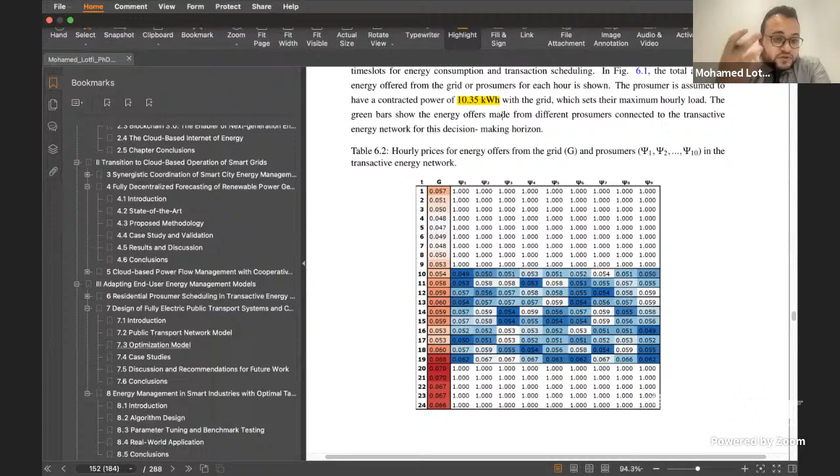In the collaborative papers, it's different. There are some cases where I'm working, for instance, with some of our colleagues at INESC TEC, and I would be working on some analysis of the result, or on formulating the hypotheses or the conceptualization. It really depends. Every paper is different. Okay. In fact, in the overlapping research, your term, there are also 14 authors that collaborated, but there we understand better the position, you worked on projects where... Exactly, I was going to say this.

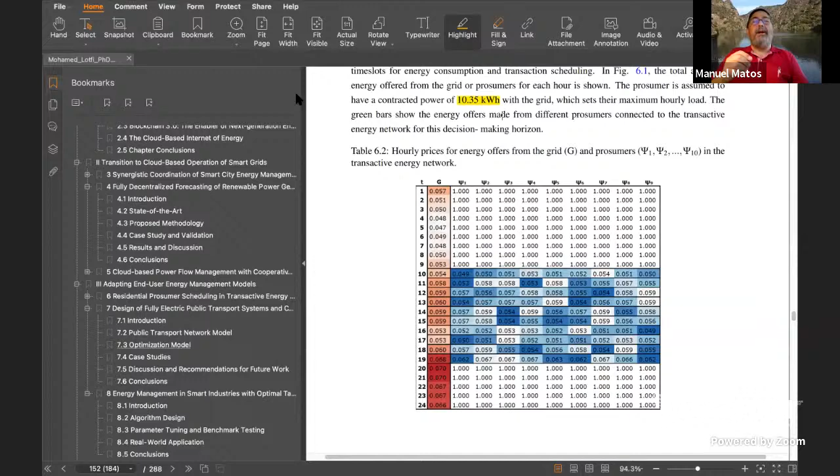Yes, okay. Exactly. Well, there was an enormous quantity of things that I would like to discuss, but I will not do it because there is no time, just to repeat what the previous members of the jury said. But the question sometimes is not clear about the meaning of decentralized here. If it is decentralized methods for obtaining certain results, or the decentralized organization of the power system. There is a big source of discussion there, but as I said, I will not do it.

I just... I'm missing here. Okay, it was in the other page. You, in page 51. Page 51. You present 4 scenarios. Yes. But then you compare the result in scenarios. What is the meaning of scenario for you that you use here? It's a situation where we have an energy management system installed in one place, but not the other, or no energy management systems installed at all. So there are different situations. You compare the situations to reach what conclusion?

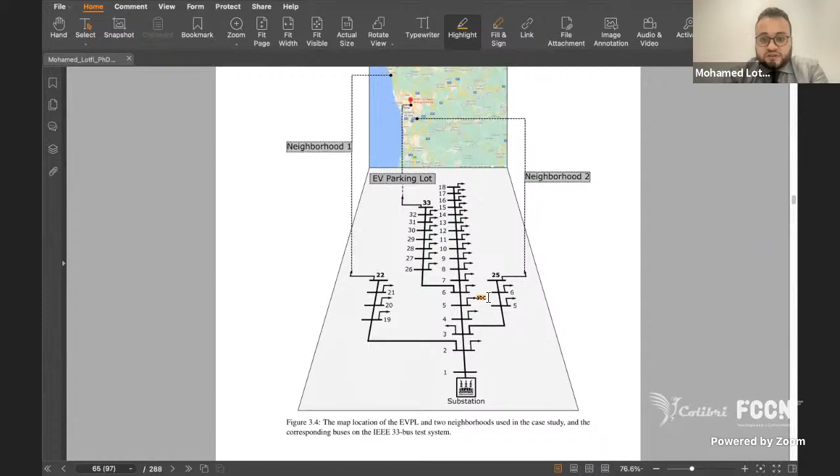As I think Professor Contreras pointed out, it's to really dissect the contribution of each energy management system towards the results that we obtain. And also he mentioned that different parties are from completely different worlds, and I think this is evident. This is just an example, for instance, here. So in fact, these scenarios do not represent possible futures as usual scenarios.

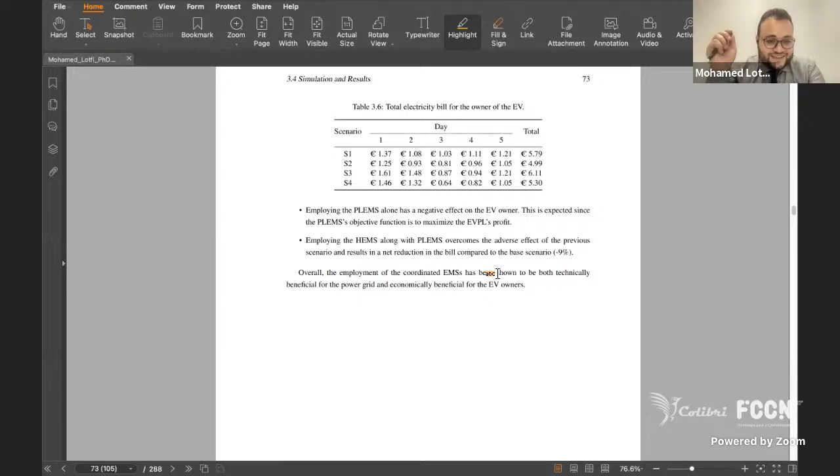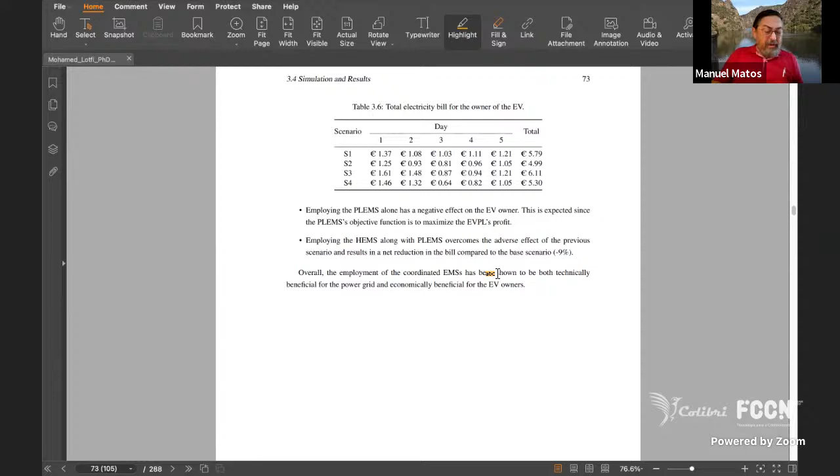No. Scenario 1 and 4, and I mention this clearly in the thesis. Scenario 1 is the base case, and scenario 4 is the one that we want to compare it with, and both are possible scenarios. Scenarios 2 and 3 are used as control scenarios, intermediary scenarios, to really measure the contribution of each of the energy management systems. But 1 and 4 are the two main scenarios that we are comparing. But so your scenarios include making decisions. No, my scenarios include comparing the synergies of having different things making decisions at the same time. That includes making decisions. That's in page 73.